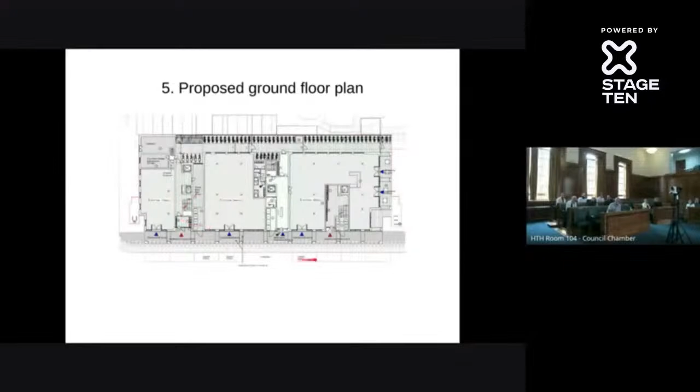There are the 2 main residential circulation cores. This one here has 2 lifts, and that would service 27 flats. The one on the other side has just 1 lift, and it would serve fewer flats, 21 flats. At the rear, there's quite a lot of cycle parking provided, a total of 153 spaces. Then at the front, there are 3 refuse and recycling stores, separate ones for commercial and residential.

The scheme will provide a total of 48 homes, including 10 affordable units. This is a provision of 21%, and earlier on I mentioned those mixed-use schemes quite close to the River Lee. This provision of affordable housing is quite comparable to those; those sites provided varies from 0 to 25%. So it's the sort of level of affordable housing we've been achieving elsewhere in the area.

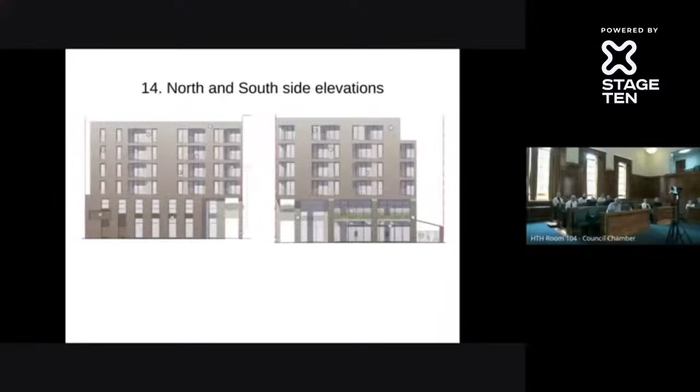The north and south side elevations of the building have the same sort of architectural treatment as the rest.

In particular, there are two bedrooms with windows at rear ground floor level and two at first floor level that would suffer a significant loss of light that, in my opinion, would lead to a significant loss of amenity for the users of those bedrooms.

So whilst of course it would be better if there were no harmful impacts at all, there are some mitigating factors to take into account here. Firstly, the rooms affected are bedrooms, not living rooms, kitchens or dining rooms where a loss of light would be more serious. And there's also the mirror image argument, which you may have heard before - it comes up in some of the sunlight and daylight guidance.

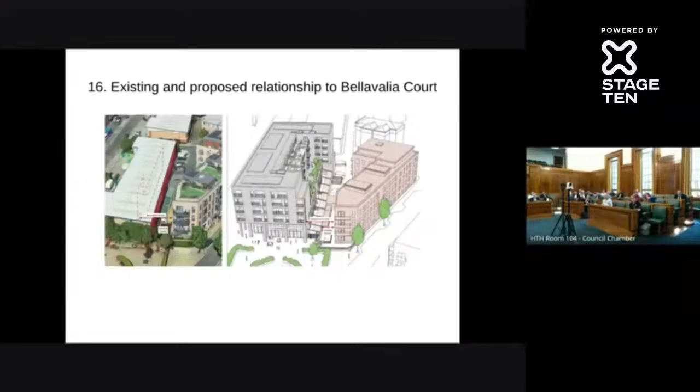I have a few, but happy to be interrupted. First of all, on the light, could we have a bit more on why you're not concerned about that significant reduction of light to those on the ground floor?

I think that was what you said, that there is quite a significant reduction, 40%, 44%. Should we take that one first? Should we take light first? I think it's an important one. So how did we come to the conclusion that this is acceptable?

Yes, most of the windows, actually, I've just showed this visual image. This shows it better because you can actually see the windows in Bellavalia Court that are affected. And most of those windows, if not all of them, will experience some sort of reduction in light. Some of those reductions wouldn't be noticeable. I think 20% reduction is considered to be noticeable.

And a 45% reduction seems a lot, but it may not be so bad. It depends. At the moment, some of those windows have a very open aspect because the existing building is 2 stories high. There's a lot of light that comes over the top of it, so they're probably getting more daylight than many others. The 45% reduction, I'll show you the windows which I think are the most harmed.

At ground level here, there are 2 bedrooms. Can you see the dot? Just about. And then at first floor level, there's 1 bedroom above that, and then 2 bedrooms above that. And then there's a bedroom at ground level right in the corner down there.

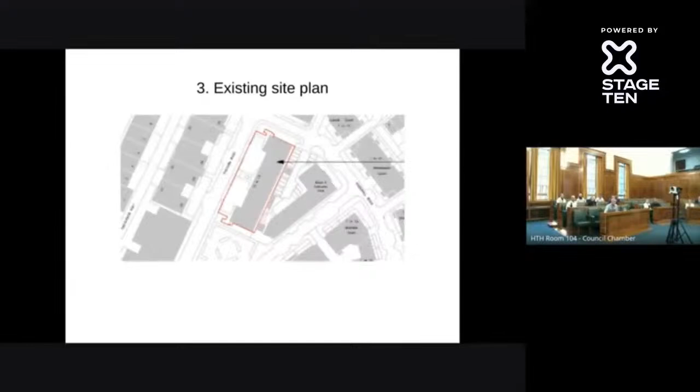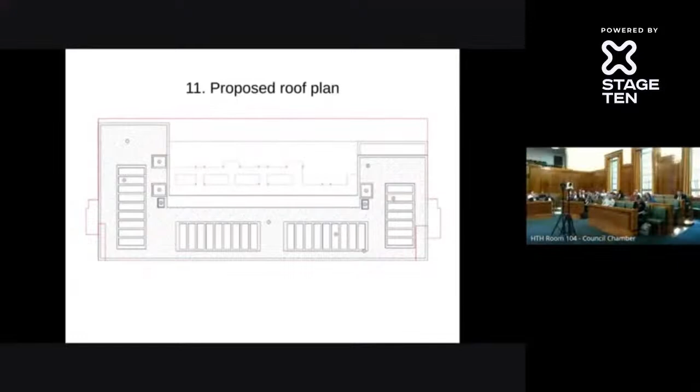Okay, so turning to the new building rather than the existing building, I see that in 6.5.4 and the paragraphs following, there's no full embodied carbon assessment at the moment, and air source heat pumps have been proposed, but there's a concern about how they'll look on top of the building. Do we have enough information at this stage to know whether the sustainability of the proposed building is good enough? I see you're proposing it's reserved by condition, but do we have enough information before us to make a decision subject to that? Or would the proposal be that it comes back to this committee to look at the sustainability of the building?

Yeah, there are some gaps in the sustainability information. There's some things which could be improved, but it's clear from the information that we have that it meets policy. It provides in excess of the 35% reduction required by policy. We'd like them to go further, and we think there are some issues that further information can be done on—on how they're actually going to achieve some of the principles, the objectives they said they'll achieve. We need more information, which is entirely appropriate to put till later.

Deciding on materials and stuff is something which is often done. It's difficult for them, if not impossible, to do now. So it's reasonable to require some of these things to be submitted later on. But we are clear that the information does meet policy. Clearly, we'd like them to do more, which is part of the reason for the conditions we've proposed.

Yeah, is that something we can ask to come back to us? Yes, absolutely. Would it come back to committee, or no? What is it that you would want to see, I suppose?

The full wording of the condition is in the addendum, and there's quite a lot of them. Some of it is very specific and esoteric information that I don't think I would understand. For example, generally the buildings we see are told this building will have air source heat pumps, they will be sitting here, and this is what the boxing will look like. In this case, we're not being told that - we're told they don't really know what they'll look like. We're a bit concerned about how they will look on the roof, and so we want them to go back and reconsider. Bearing in mind the neighbours are quite anxious about how this is going to look and impact on them, it would be nice to know what that system is going to look like and whether it's going to be an eyesore.

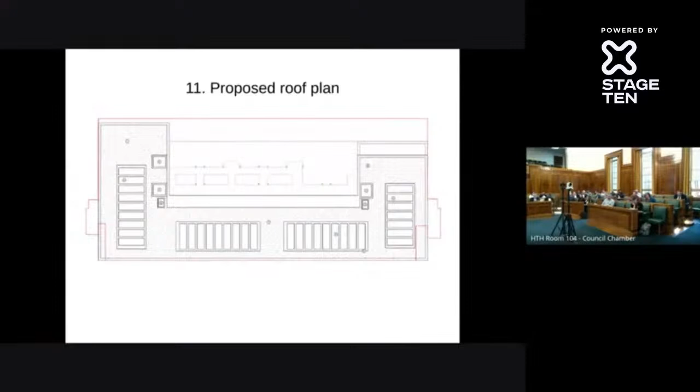This development has been in consideration for a while, and at the time it was originally designed, air source heat pumps weren't really a thing, so they've been reintroduced into the scheme. It's not the kind of air source heat pump scheme you've seen before with equipment put on the roof. In this instance, there's a plant room proposed at ground floor level, and we're proposing a combination of an air source heat pump that can be fitted there and ventilated, and a highly efficient gas boiler - I think 97% efficient - and that's part of the specification of that equipment, which is one of the details we've reserved.

In this instance, putting quite large pieces of air source heat pump equipment on the roof we don't think is a good idea, because the building is relatively low, and the topography means the roof is quite visible from a long way. We don't really want pieces of kit there. If air source heat pumps had been considered when the scheme was originally gestated, it would have been integrated more fully into the building, like we're doing with many schemes now - not plonked on top of the roof but incorporated within the envelope. This has been done here, but because it's at ground level, there are limits on what you can achieve with air source heat pumps. That's why we've got to this situation.

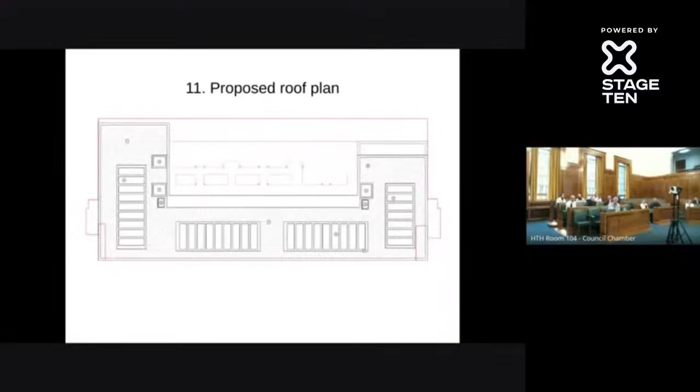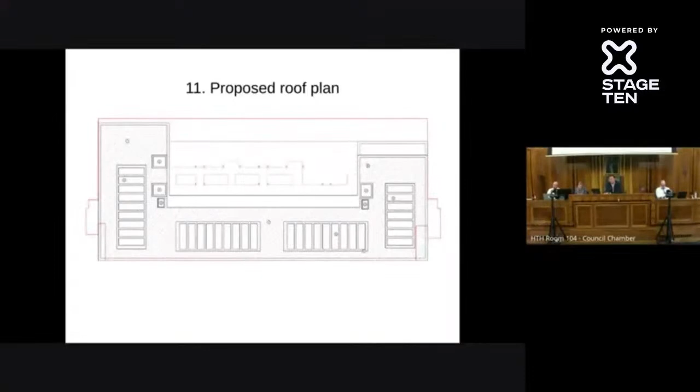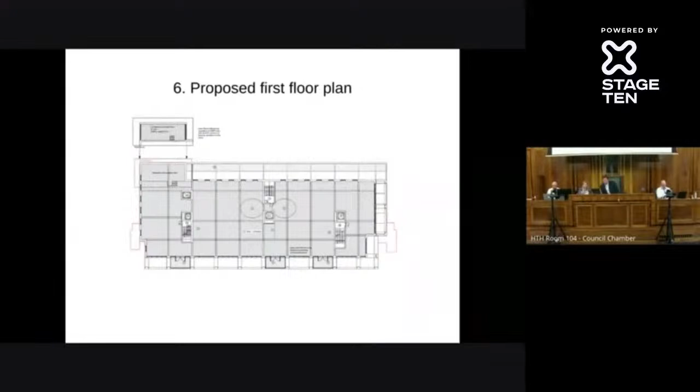So there'll be PV panels on the roof, not a deck. Where will the air source heat pumps be seen, since they need an outflow? The plant room is entirely internal - you can see here in this corner the LEV substation and a plant room, which has a mezzanine at first floor level. So there's a two-story plant room at the rear to accommodate the gas boilers and air source heat pumps. The only thing going on the roof is fairly low-profile PV panels, plus lift overrun, and emergency opening hatches for fire ventilation. So the roof will be a biodiverse roof with PV panels, but it won't have the air source heat pumps on it.

Residents are concerned about the aesthetic of the rear of the building particularly. Can you talk us through that a bit?

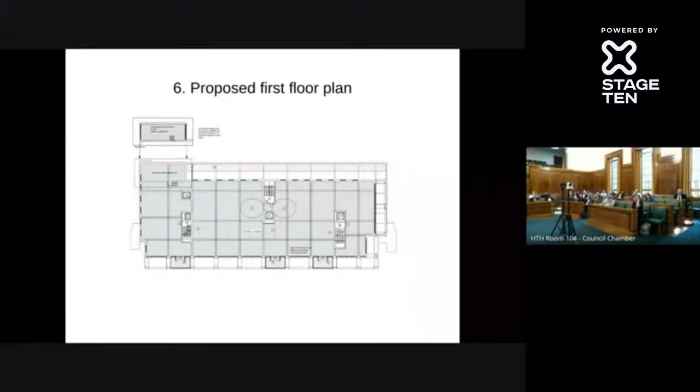For instance, the deck access is set far enough away from the residential windows to allow one neighbour to not look into close proximity of their neighbour's windows. And there's the private amenity space, which is the sort of greeny area at the back.

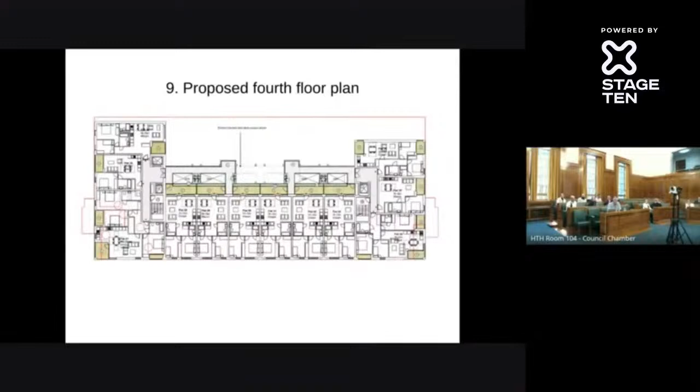We have Luciana online as well, don't we? We do, yes. Luciana, just in terms of that rear elevation, do you have anything to add from a design point of view?

Just to highlight that there was work done on that rear elevation to improve the appearance, particularly after the scheme was presented to DRP, because there was feedback from them. There was the addition of the brick grid, particularly on the upper levels, to add articulation. We think it works where it has a very robust brick base, and it's really well articulated with the recessed brick panels on the sides, and the rhythm of the window openings. I think the way they've articulated the deck access provides some interest to that elevation.

Okay, and the deck access and bringing it back at the back presumably increases the light, does it? Instead of filling the entire block in?

Yes, well, I suppose Rob can comment more on that aspect, but it does help. I think one thing it does help with too is to break the massing a bit, so it's not too oppressive and solid. So it definitely improves in that sense too.

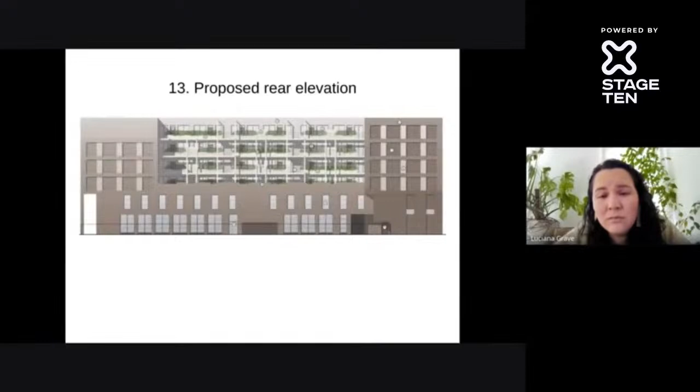Yes, if I can ask Nick, is it intended to build these traditionally with brick and breeze block, or is it going to be timber frame? There was a very nasty fire several years ago in a building a little way before, and I'm not sure what the building composition was, but it spread like wildfire. So, A, composition of the building, and B, can you confirm there won't be any cladding which could exacerbate any fire? Also, I noticed in the report there's no feedback from the fire service.

Is there any particular reason for that? We certainly used to have input from various statutory organisations like them. So perhaps I could ask Graham if you've had any contact with them to check they're happy with the design.

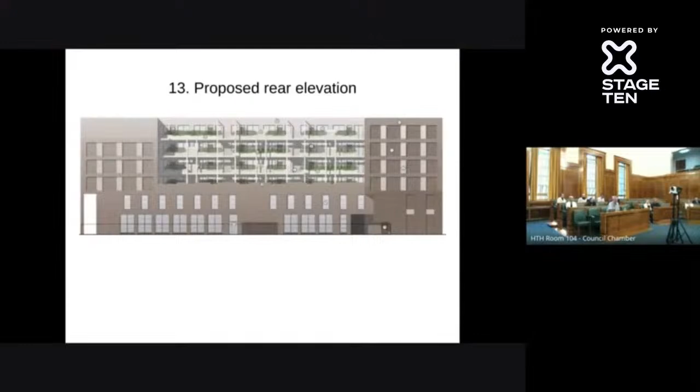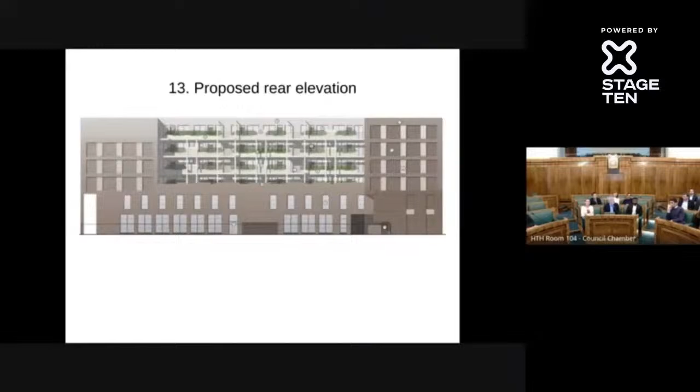Well, I was just going to reiterate that point. Obviously the main material used is brick, as you can see from the main elevations. But what I'd highlight is that the building regulations and the fire regime is a very fast changing area at the moment, and we will be, following building regulations control, taking specialist fire advice on that. But as Rob highlighted, it's not a tall building in a fire sense, so we don't see that being a problem. It's just a process one has to follow very carefully.

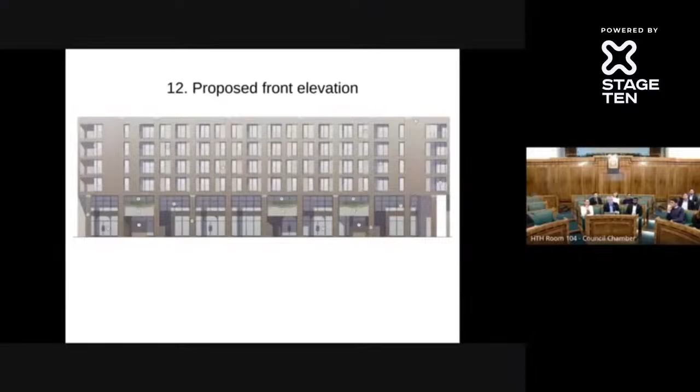Yeah, thank you. So it was just on the housing tenure mix. It says that the unit size mix isn't compliant with policy. I was just wondering what discussions were had with the applicant about whether that could be adjusted to make it more policy compliant in terms of the number of 3 beds, 2 beds, 1 beds, and how that relates to the disagreement on the financial viability assessment of what was viable in terms of housing.

Yes, I think in terms of the housing mix, it's more the recommendation policies. For 33% for 3 bedrooms or more, this delivers about 20% from memory. So it's not far off, or is it 18.5? Yeah.

That's not unusual in a scheme. Once you get over 20 units or so, and the schemes get bigger, it tends to have fewer of what used to be called family-sized units in them. We'd rather have more, but then again, we'd probably get less affordable housing if we did that.

And in terms of the viability, I think we've agreed this offer of like 10 affordable housing units to go in there, even though the developers are insisting that they think that scheme is not viable. We think the differences between us in terms of the viability relate to the inclusion of the financial cost of a restrictive covenant that applies to the site, which we think should be reflected in the value of the site itself.

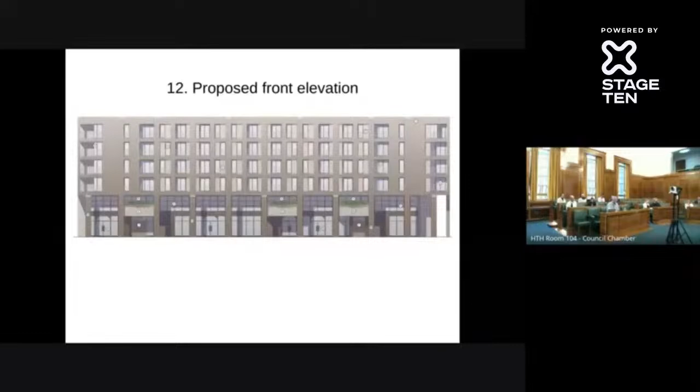Okay, I've got questions if no one else does.

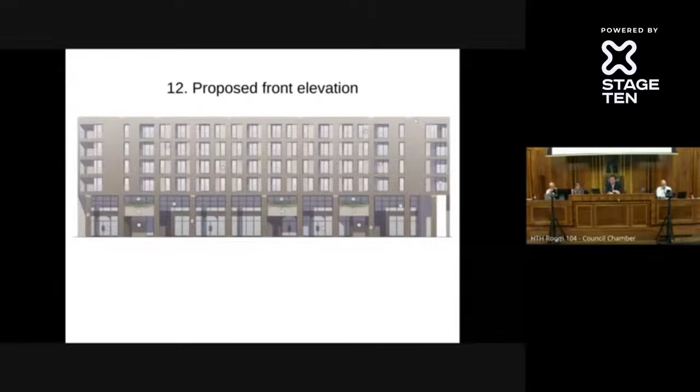Right, okay, in that case, just on the loading bay and the current building, it obviously has a drive-in bit for the offloading and work of the building, and that's being designed out essentially. So now the streetscape has to bear any sort of loading for the businesses that will take space in this building. So why is that acceptable, to lose that off-street loading capacity and move it onto the street?

I think it's because of the comparative nature of the service demands for the two uses. The existing building is predominantly storage. You can see some of the yard in front is actually used for open storage. The vehicles using that tend to be much larger and have longer waiting times, so require somewhere off street to be. The proposed ground floor space is purpose-designed industrial space, but it's not going to have the old-fashioned industrial uses in it. It's going to have the equivalent of modern light industrial uses, which have far less requirement for servicing demand. We think it's acceptable for that to be done on street. And that's really it, I suppose.

Okay, Joe, can you expand on that a little bit? Sorry, I forgot you were online.

Yeah, further to what Rob is saying, that nuanced change of use means that the delivery and servicing impact is going to be considerably less. The applicant submitted a trip generation assessment estimating around 10 commercial deliveries per day, which is fairly modest. We're certainly satisfied that will be appropriate on street from that loading bay.

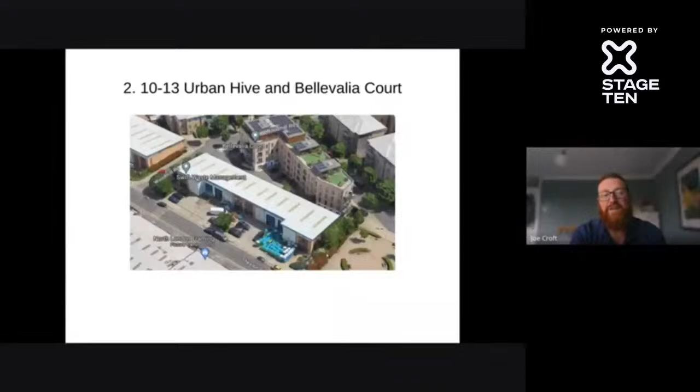So we're certainly satisfied there shouldn't be any undue parking stress. Linked to that, in terms of policy, the council is extremely clear that we will continue to do everything we can to make it difficult to own and run a private vehicle in Hackney. Around 36% of our residents own private vehicles, so it's a minority, and we want to continue to reduce that. In the local area there are school streets and low traffic neighbourhoods, a number of sustainable transport schemes that restrict vehicle movements. We've got an exhaustive CPZ, and we're making the site car free as well. So weighing that all up, there shouldn't be any undue detriment to vehicle parking stress in the local area.

Okay, thanks very much, Joe. And just a couple more things from me, keeping an eye on the committee. There was a question raised about the 4-foot setback on the covenant of other buildings on the street - is that a material consideration in this one? No, and no.

Can I just ask the objector what the point was there, sorry? I'm double checking with our solicitor, but in our land searches when we applied for the property, there's a covenant across Wood Mill Road. It was previously a sawmill, and there's a covenant stating you can't build above 4 stories, and the house must be set back I think 4 feet from the street. I haven't been able to obtain a copy in time for the meeting, but can send it over once I receive it from the solicitor if needed. Is that specific to a separate building, or for the street this is on? I'm quoting from memory because we only purchased the property a few months ago - I believe it applies up to the edge of Thaden Road, but I need to check that. Okay, that's fine, thank you.

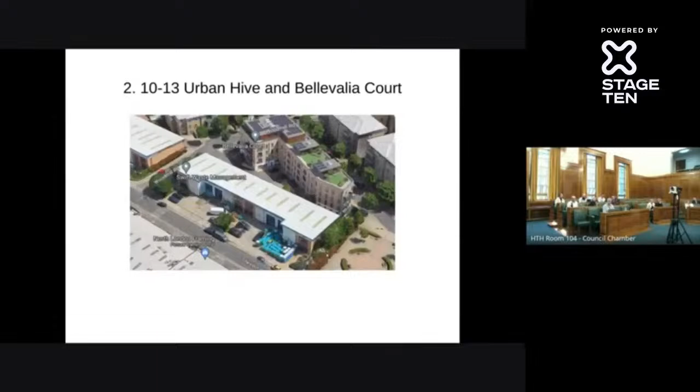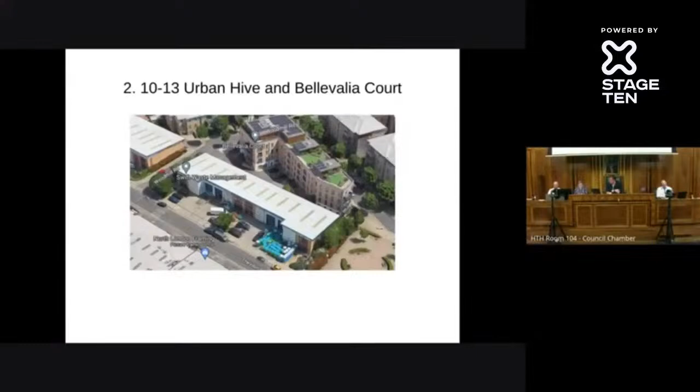And then we heard about overlooking, or rather in-looking, from the rear elevation of the new proposed building into Bellevalia Court. What is the impact and what's the analysis of that, please? The distances vary because Bellevalia Court's at an angle, but with the setback of the upper floors, the distances are not unusual at all.

Maybe if I just show - we've got the main rear elevation of Bellevalia Court here, and the rear building line here, which is probably up to about 30 meters, maybe more. What was of concern to us in terms of overlooking and visual privacy was the use of the amenity area at 2nd floor level. If people were coming up to the edge, that's closer - the distance is about 24 meters. Hence the request for a condition to require a privacy screen there. But the distances on the upper floor levels are not at all unusual in a borough like Hackney.

Was there any consideration to set the deck back slightly, so the edge of the deck is brought back? That's a balance between increasing the visual prominence of the deck for the Bellevalia residents, versus protecting the visual privacy of the future occupiers. You don't want people wandering down the deck in very close proximity to your windows, but then again you don't want the deck too far away so that it's too visually prominent from Bellevalia Court. The distance being proposed, we're sort of comfortable with.

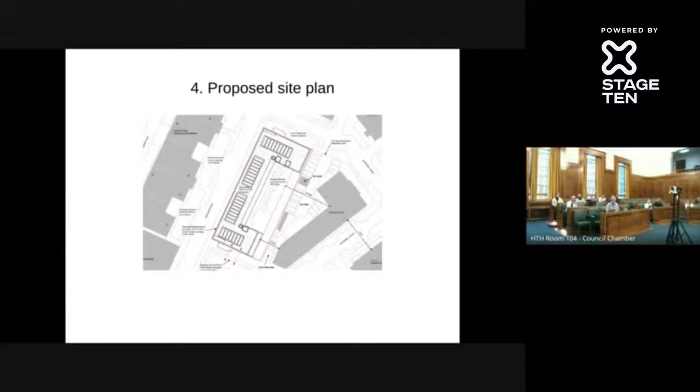It's based on a review of viability. And unless there's some amazing change in wider economic circumstances, I'm afraid the development's likely to get more expensive and less profitable in the future. But the viability review mechanism is there in case there is some wider change in economic circumstances, which means we could achieve more affordable housing without making the scheme unviable. And this has happened in the past, on a reasonable number of applications, and it has been activated, so the mechanisms are there.

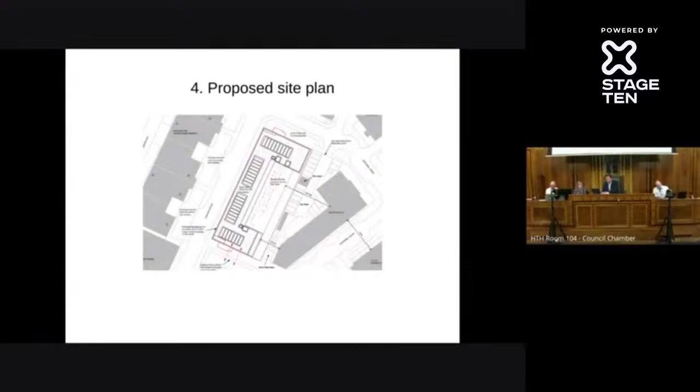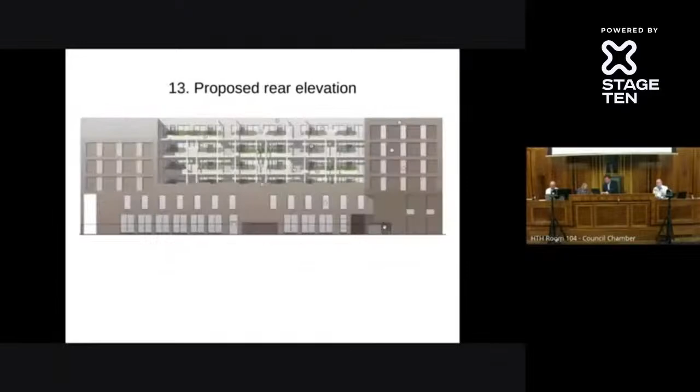Great, any other questions? Okay, none from me. Great, in that case, if I just bring up papers again, we'll go to a vote. Chair, the recommendation is in your chair's brief. Oh, thank you, well done. Sounds like you do my papers in that case.

Yeah, exactly. Great. So the recommendation is to grant planning permission subject to conditions and completion of a legal agreement. Can all those in favour raise your hands? Thank you, that's unanimous. Okay, thank you very much. Thank you for everyone participating.

We'll wait because I think we'll have a bit of a move over of speakers, objectors and applicants. So in terms of speakers, we've got no objectors for item 6, Development House. And in terms of speakers, we've just got Matthew. We got to pronounce that correctly? Okay, thank you, Matthew. So if you want to move over, we've got a choice, you can either go.

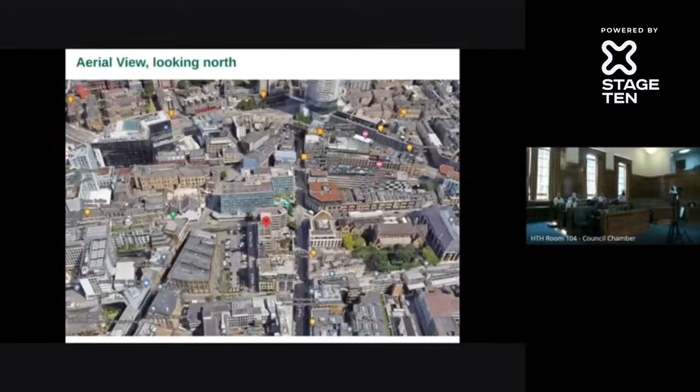Looking north, the site lies within a mixed context of residential, retail and commercial properties. Scales vary quite widely, but shoulder heights are predominantly 3 to 5 stories, climbing upwards as they move towards Old Street roundabout and the City Road. 49 to 51 Paul Street lies directly adjacent to the south and is in an advanced stage of construction to become a 10-storey hotel. Telephone House can be seen here in the foreground across Leonard Street to the north. It's another 7-storey post-war office building, which is the subject of another current application for redevelopment.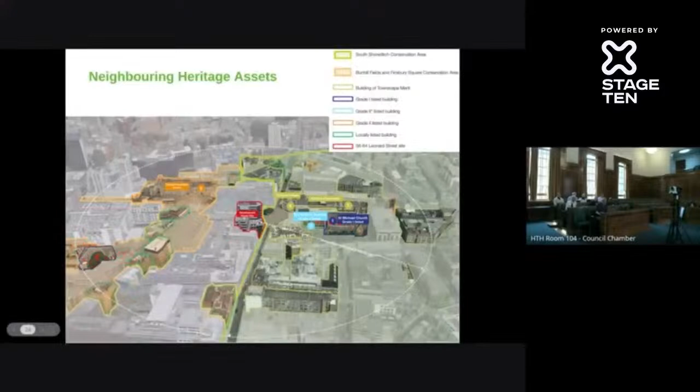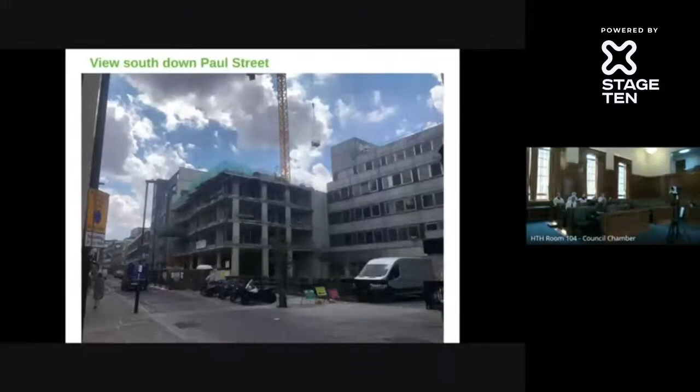This scheme is very similar to that approved previously under 2017-4694 and 2020-0694. Since the time of the previous approvals, in most respects, the policy context has remained consistent, though a new suite of policy documents are in place. Nevertheless, the committee report details areas where policy has been amended, such as sustainability. The reason for the current application is that the original permission was never implemented and is no longer extant, so the approved scheme could no longer be built.

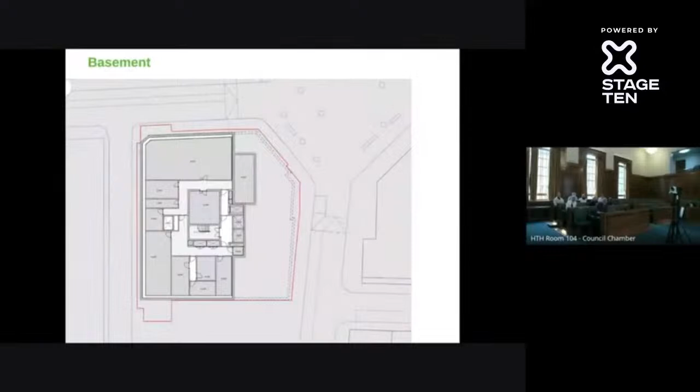Taking a look at the plans, there are 2 basement levels. The first is for plant. The lower ground floor has around half of the 804 square meters of affordable workspace. This would be provided at 40% of local market rents in perpetuity, in line with policy targets for the Shoreditch priority office area. On this floor, there's also a large cycle parking area. The increased size of the cycle parking store is one of the few changes to the approved scheme.

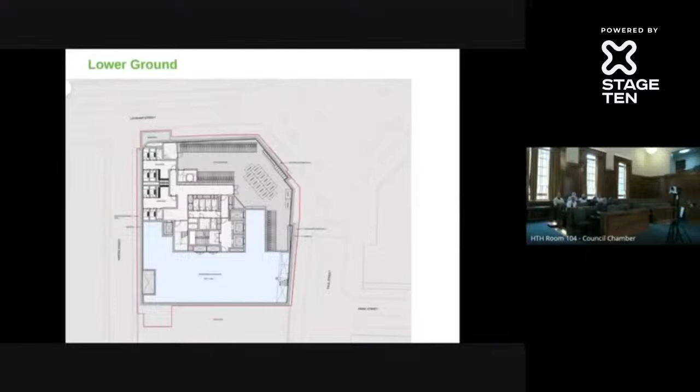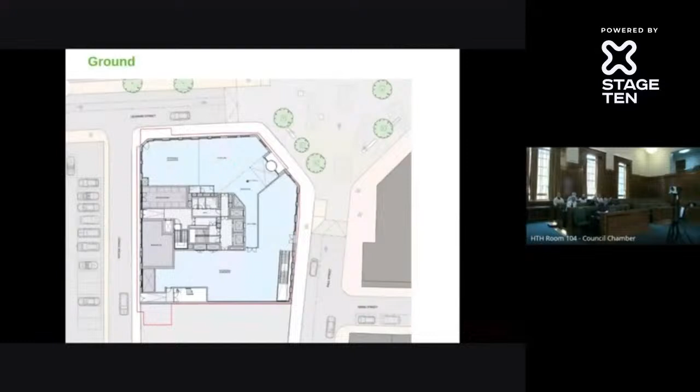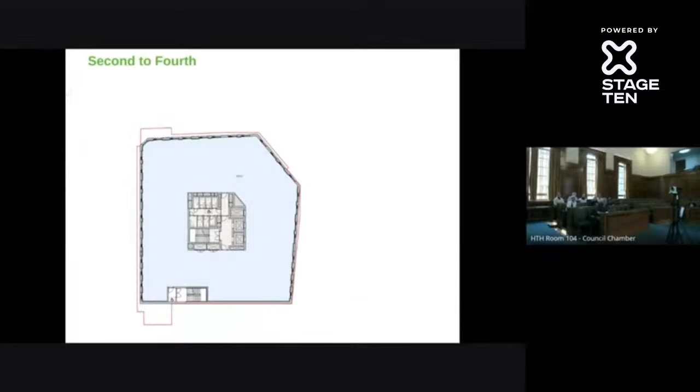The ground floor plan has the rest of the affordable workspace here and along here, and also the retail or restaurant space here, providing an active frontage onto Leonard Circus. The upper floor plans are all in office use. As is laid out in the committee report, the proposed accommodation is of high quality. The 2nd to 4th floors all have the same floor plate. As the building rises, terraces are introduced, reflecting a reduced massing.

At the 9th floor, the scale is greatly reduced and a larger terrace is introduced. This will provide amenity space for the new office workers.

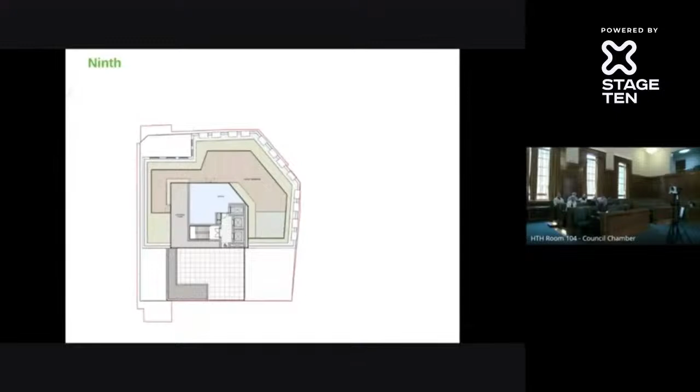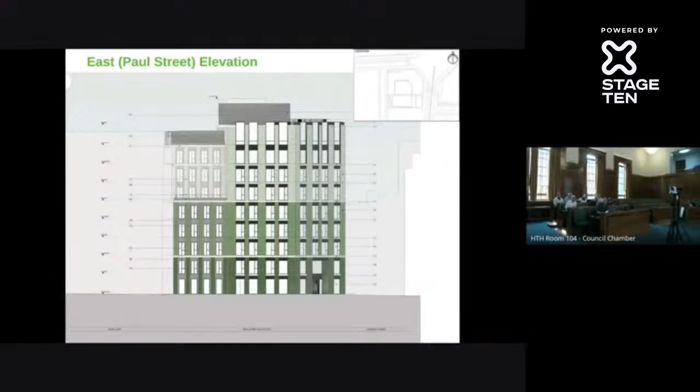As laid out in the committee report, in design terms, the proposal is considered of high quality and appropriate character. The cutbacks to the Paul Street and Leonard Street elevations reduce the perceived bulk and create a slimmer profile to the taller block when viewed directly from Leonard Circus.

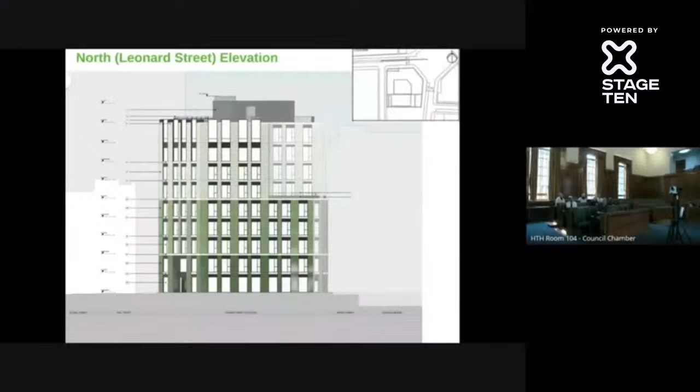The modern warehouse typology, robust vertical proportions, and richness in detail of the proposed glazed brick facade is considered to successfully reference the local area in a contemporary manner and to capture the character of the surrounding streets.

In conservation terms, while there is some harm identified from the height of the taller element on the setting of the South Shoreditch Conservation Area, this harm is considered to be less than substantial.

This slide shows the proposed view past the Grade 1 listed St Michael and All Angels Church, which has had a recent approval for a 6-storey building on the Leonard Street frontage in the foreground here. Here too, the harm caused to the building setting is considered to be less than substantial.

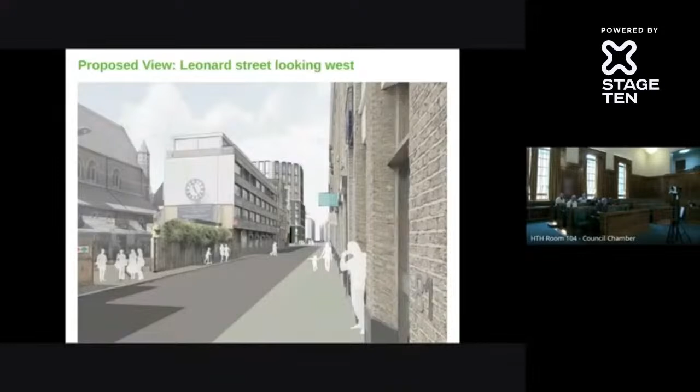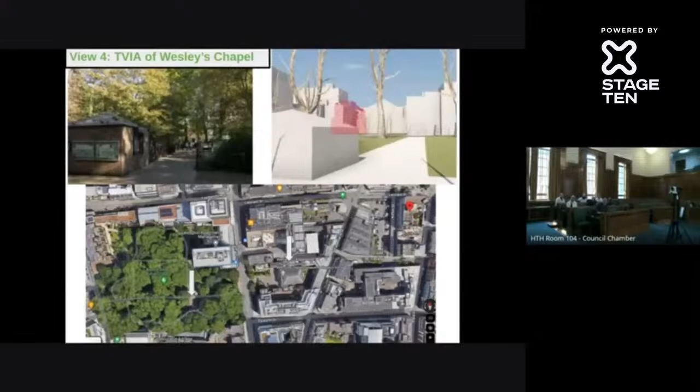London Borough of Islington have raised concerns about the impact on Wesley's Chapel, but we consider that the views are so limited that any low end of less than substantial impact is outweighed by the benefits of the scheme.

With regard to the public benefits, the committee report finds that the proposal's high design quality, its enhancement of a rundown site, and its activation of the Leonard Circus frontage, not to mention the amount of employment floor space, would meet the public benefit test to balance against any less than substantial harm it causes to the setting of heritage assets. Overall, the proposal is considered acceptable in conservation and design terms.

The committee report also examines the amenity impacts of the proposal in detail. While there are some significant amenity impacts to daylight, sunlight, and outlook, for example, these are in line with the impacts of the consented scheme.

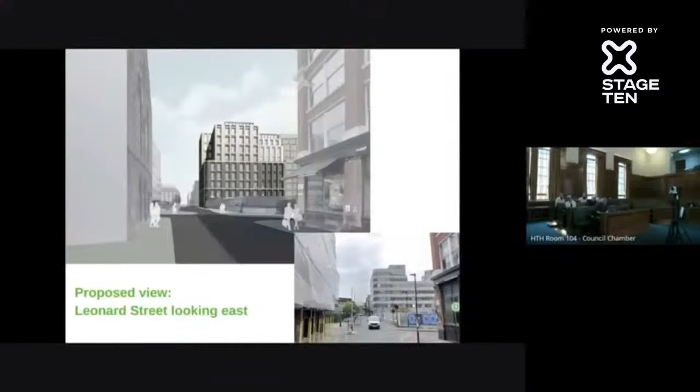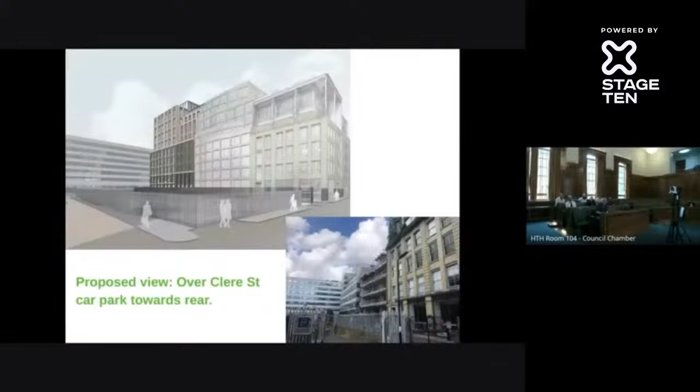Neighbouring residential properties would be left with levels of daylight, sunlight, and outlook that we assess to be typical of the surrounding inner city environment, and the amenity impacts of the proposal are considered to be acceptable.

The proposed energy strategy includes many energy efficiency measures, and there are a number of conditions to ensure the sustainability of the building is carried out effectively. A BREEAM rating of excellent and above 75% is required.

The building will utilise air source heat pumps, and renewable technologies in the form of photovoltaic panels will be provided on the roof, which will help to meet electricity demand. The scheme exceeds the minimum 35% reduction from the carbon baseline, in line with the GLA and Hackney energy policies.

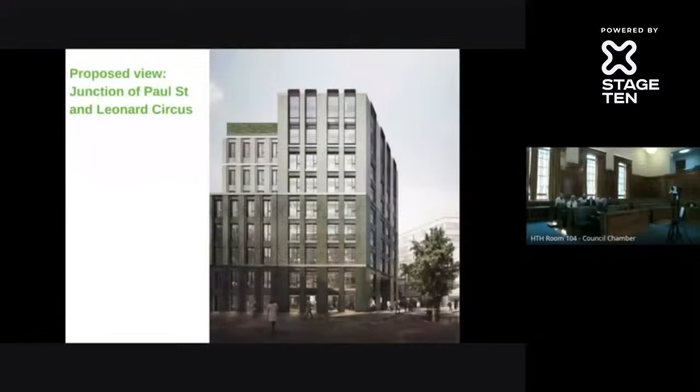The shortfall from net zero is 55 tonnes per year, which requires a carbon offset payment of £157,000 to be secured through the proposed legal agreement.

In terms of transport impacts, it's also considered acceptable. It would be car-free, save for one blue badge space to be provided nearby, and the long stay cycle spaces are to be provided with a balance between accessible spaces and overall quantum. It will be determined at the next stage, in line with the recommended condition.

There are no short stay cycle places proposed on the site itself, and as at the time of the previous approval, a financial contribution has been agreed to provide the required 31 short stay spaces within Leonard Circus.

Since Transport for London have identified a high level of usage of the existing cycle hire stands in the immediate vicinity, the applicant has agreed to pay £55,000 to help provide a new dock nearby.

A financial contribution towards highways works of £235,000 has been agreed to enable works to the adjacent pavements and an extension of the stone surfacing of the circus onto Paul Street.

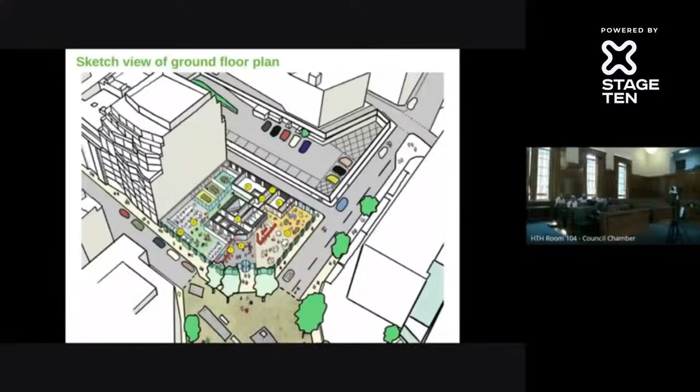To conclude, the proposed application is considered to be policy compliant. The use is appropriate for the priority office area, with the ground floor providing an active use onto Leonard Circus. The proposal represents a high quality design that would enhance this highly visible and underutilised site. As detailed in the committee report, in these and other respects, the scheme is considered acceptable. It's recommended for approval, subject to conditions and a legal agreement.

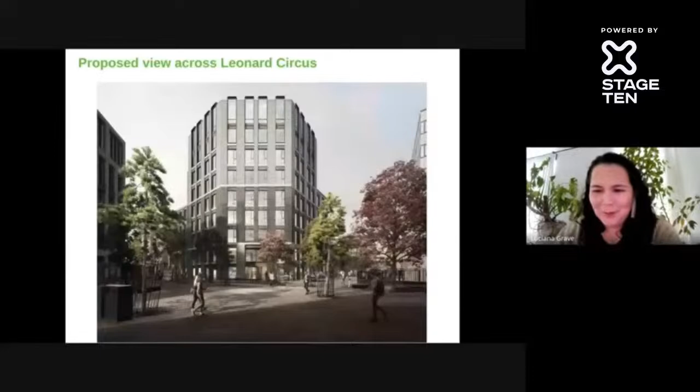I'll stop there, and I hope it answers your question.

Okay. Looking at pre-app 1, pre-app 2, and then the DRP, pre-app 2 had it much more broken up. It's not a monolith to the top. It's got some design aspects on the top floor that provide a bit more of a breakup on it.

But that was chosen and designed—I can't speak to it fully—those were pre-apps done prior to the previous approval, rather than this one. This one has been put in because this is what was put in before, to be blunt, and it was found acceptable before. They haven't done additional design work on this one because we consider it to be a high quality design with many of the features we were looking for in this location, and approved it on that basis. So they haven't gone back and reinvented the wheel. But pre-app 1 and pre-app 2—I'm giving you reported speech about what was happening there, based on what previous design officers told me.

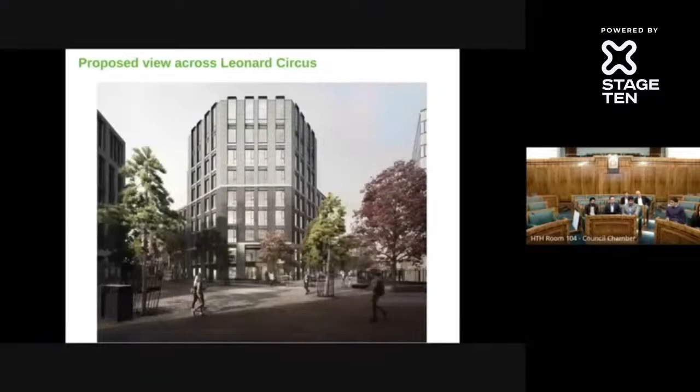In terms of incineration, the waste plan has 20% going to incineration. It'll be reviewed, and because the circular economy is monitored by the GLA, we'll be looking at diverting it to reuse sources first, then potential recycling, depending on the condition. Thank you, that's it. Thank you, Councillor Young.

Yep, Jess. Chair, it's not the building itself, but with this committee, particularly with big buildings, you get this feeling of being squished in. We used to ask about streetlights and whether they could be incorporated into the building to take away street clutter. I know it's not there, but I wondered if this is something we still raise with applicants, to take one thing off the pavement. Is this for Nick or Luciana? I'm just trying to remember if we had a street lighting condition, because it's such a tight site.

I'm not 100% sure, but there may already be an existing street lighting strategy that's part of the Leonard Circus redevelopment. I don't know if anyone on the call would know about it — I'd be putting Joe on the spot, but he might know.

Whether there was anything, there might be kind of like decorative architectural form street lights as part of that square. So that might already be in place. It might be something that we wouldn't necessarily want to adjust. So I don't think we'd want to pile straight in and suggest street lighting on the building for this one.

Yeah, I think Joe wants to come in. Joe, are there streetlights there? Are they decorative that we want to keep, or are they not?

I don't know specifically, but clearly Leonard Circus is already an area of high quality public realm, and the Leonard Street reworks will be very, very high quality and funded, significantly in part by this development. So I would very much anticipate that high quality street lighting will have been factored in, and obviously all of our policies are geared towards minimizing and reducing street clutter wherever we can for obvious reasons.

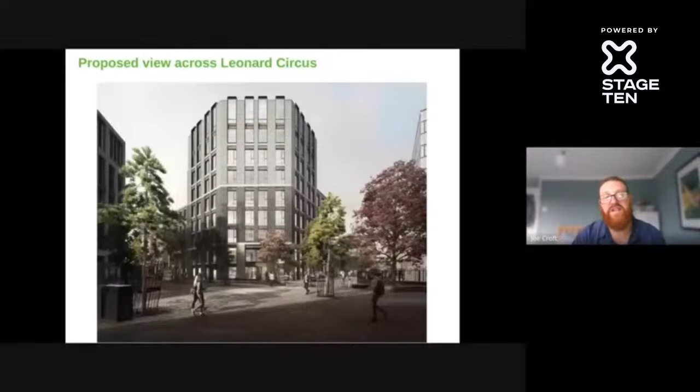I suppose the question remains: does the planning department still encourage integration of street lighting into the buildings when the paths are so narrow around there, for example? Is it something that's asked of applicants? Is it in policy?

Sorry to cut across you, I probably should have answered that bit of the question straight away. We've imposed it as a condition a few times, and it was always a kind of feasibility condition. I don't think there's ever been a scenario where the developers, very willing developers sometimes, have managed to come to an agreement with the council on it because of the logistics of it.

Just very quickly doing a site visit via Google Maps, looking at the street lighting in Leonard Circus, it's all brand new and it's all been done. It looks like it's been designed very much with the remainder of the public realm in mind. So I think it wouldn't make much sense to try and suggest any changes in this case.

Okay, thanks very much. We should tackle Wesley's Chapel, given the comments from the neighbouring borough in particular. So can you just run us through the objection, the analysis, and why you've ended up where we have, just so we're clear on it?

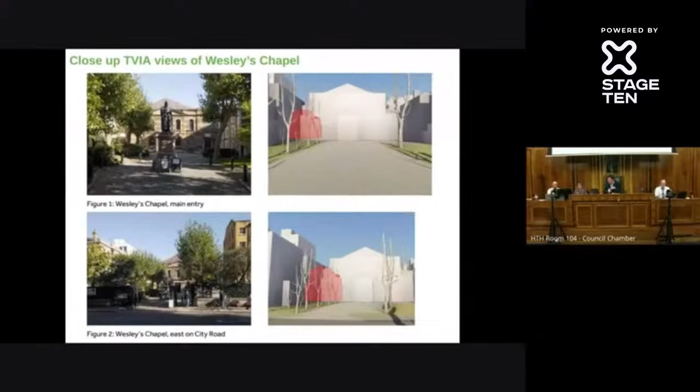So I've got two additional slides in case this came up. If you look close up at Wesley's Chapel, you can see in this figure 1, this is a close-up view. You don't see anything in view 1. Then you get the tiniest sliver coming through that if you zoom in, which probably wouldn't be that helpful. Just believe me, there was the tiniest sliver here on figure 2.

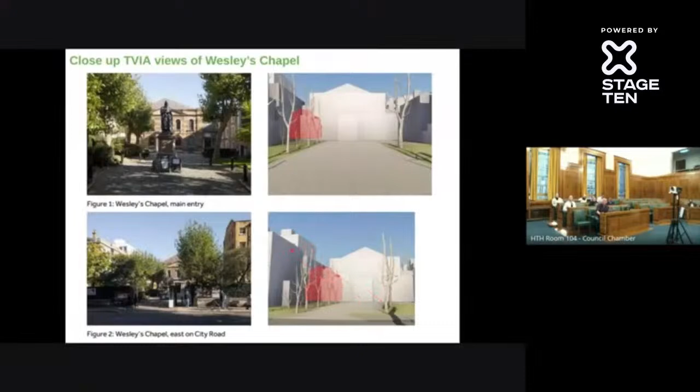At that point, we consider this to be really a very low level of less than substantial harm. And just as we've balanced that against the public benefits in terms of the heritage assets with the conservation areas or the St. Michael and All Angels Chapel, we've considered that it balances acceptably against those public benefits.

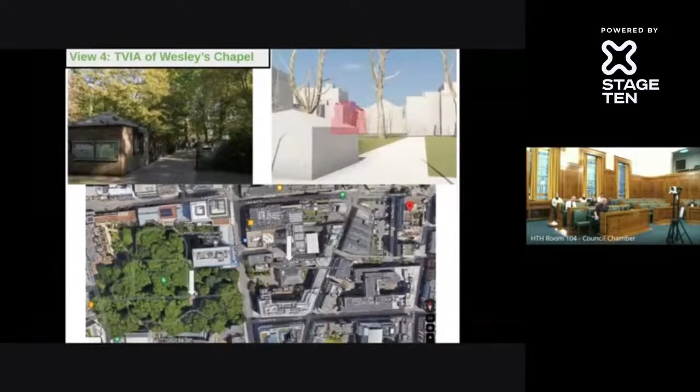Okay, thanks so much. Everyone content with that? Yeah. Any other questions from the committee? No? That's coming from me. I think the tiles in particular are really good. So on that, great. Shall we go to a vote in that case?

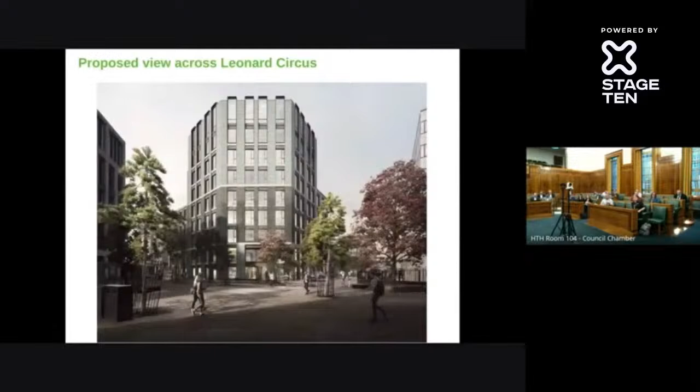Great, fantastic. So the recommendation is to grant planning permission subject to conditions and completion of a legal agreement in relation to section 106 of the Town and Country Planning Act 1990 as amended. All those in favour, raise your hands.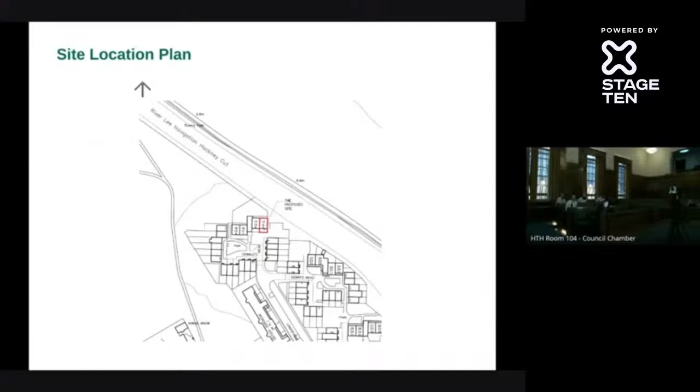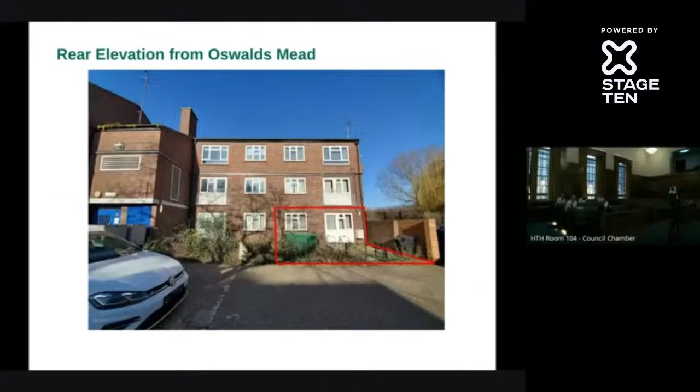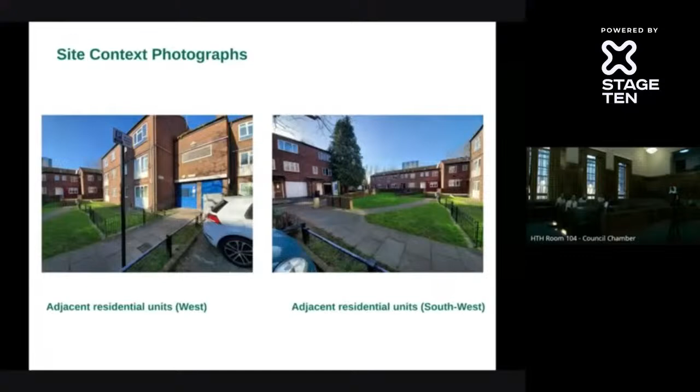This is just a rare picture of the front elevation, as they've called it. Outlined in red, you can see it's the ground floor unit, and this is from the front within the car park. This is referred to as the rear elevation, where the cycle storage would be proposed. For context, this is the adjacent building with residential units and the surrounding adjacent residential units.

So the proposed unit would be a 1-bed, 2-person flat with a gross internal area of 50 square meters, and it would be social rent. So the only external change is the cycle storage unit, and that's just an example of it there.

To summarize, the development would not give rise to any significant offsite amenity or highway impacts and would be delivering a public benefit in the form of a social housing unit. All other material planning considerations have been covered within the committee report. So the officer's recommendation is to approve the planning application subject to conditions and the completion of a legal agreement.

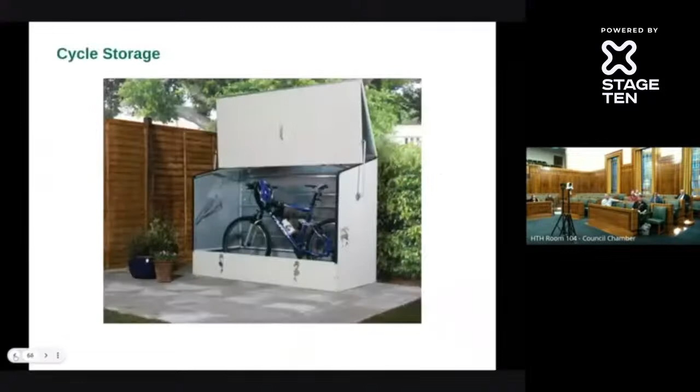Does anyone have any questions? I know what they'll be. Anyone, hands up? Go on. I don't know this particular estate, but are we doing anything to reduce the risk of damp and mould in the property when we're doing this renovation? So in effect, are we also retrofitting it?

My response to that would be that the existing use prior to the community flat was residential itself. So I guess, to my knowledge, nothing new.

Any answers, or is that from the applicant? Yeah, I mean, just to say that the flat would be refurbished as part of its conversion back from a community flat. And obviously as part of that, it's got to have adequate heating and ventilation, which obviously mitigate against the effects of mold.

So is the SAP rating or is it EPC at the moment? Is that building, that block, and therefore this flat, already at an EPC, a sort of acceptable level of energy efficiency? Sorry, are you asking if it's got a damp-proof course? No, I'm asking if it is at an acceptable level of energy efficiency at the moment as a building, normally called an EPC, that is the acceptable level for renting out.

That's covered by building regulations probably more than planning. Yeah, but you'd normally see a proposal that says we are building this to X standard. Yeah, but I suppose it's change of use, I don't know whether that's okay. So, Catherine, can you just run us through what you do with it?

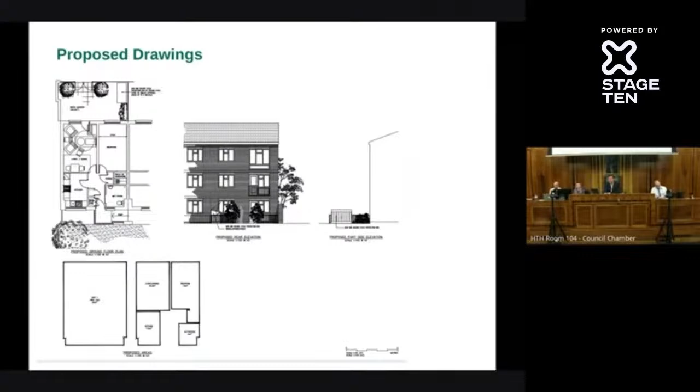Great, thank you. And then just the cycle storage, is that a standard cycle storage solution used by the council? Because it doesn't look hugely robust.

Yes, sorry. That's the same cycle store we've proposed on previous flats, and it's galvanized steel and lockable, so it is secure. I think it's bolted to the ground as well. It looks quite plasticky in the photo, so if it's galvanized steel, that's better, I suppose.

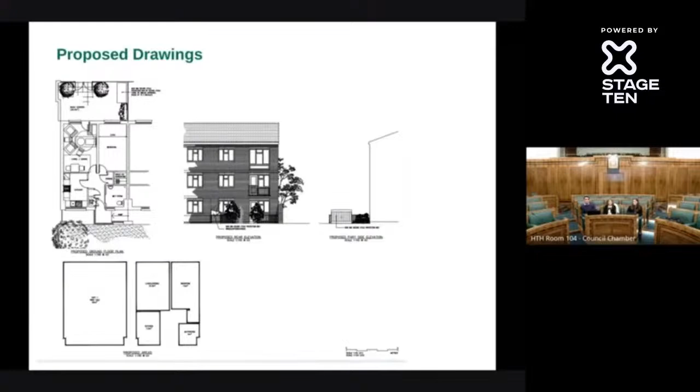Great, any other questions? We've seen some of these before, so I think we know where we are. Okay.

Let's move to a vote. Recommendation is to grant planning permission subject to conditions and section 106 legal agreement. All those in favour, raise your hands. Great, everyone, thank you very much.

Great, thank you. Let's move on swiftly to the next one. I think the supporting people will remain in place, but we are moving on to 15 Keir Hardie Estate, and we are being led by Thomas Russell. Hi.

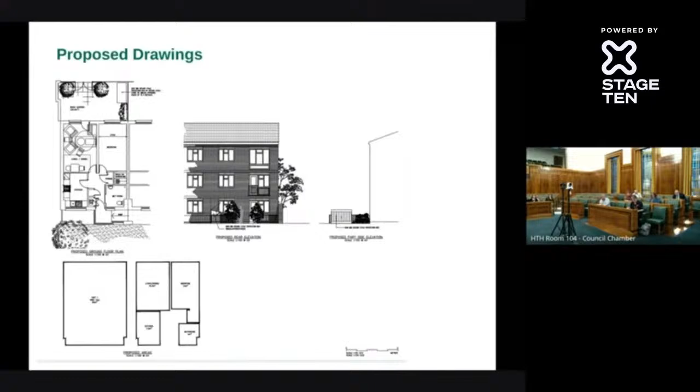Okay, so this application is very similar to what Catherine has just presented. It's for a change of use from a community flat to a residential unit. It's at 15 Keir Hardie Estate. This site is a community flat on the ground floor of a 5-storey block, directly to the east of Upper Clapton Road and to the south of Springfield and Springfield Park. The unit would be socially rented.

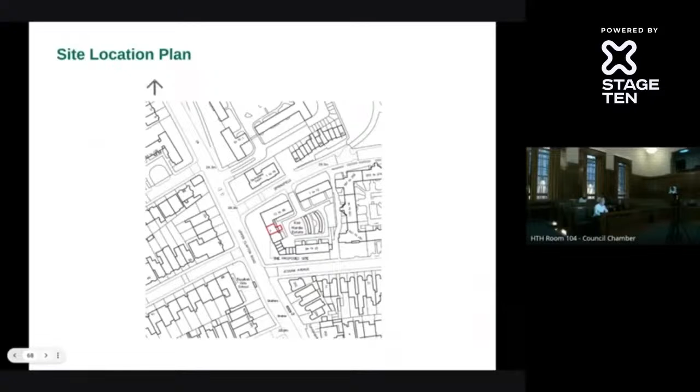So the design, there's minimal internal alterations proposed, but there are a few very minor external changes. One of them is the installation of a cycle storage that would measure 1.34 meters in height and 1.97 meters in width. They're also proposing the removal of a very small window across the front elevation.

This won't change the character of the front elevation of the unit. If I just go back a couple of slides so you can see the front elevation of the block - the flat above has also removed that very small window here. So there won't be any impact on the character of the front elevation of the block.

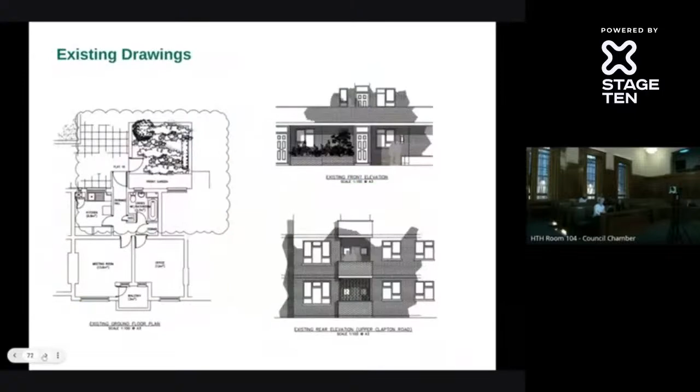In regard to alternative sites, it's obviously very small, not very usable for large scale meetings. There's a number of council-run accessible community facilities within walking distance, including Leabridge Hall just to the east, Wrens Park to the south, and Webb Estate to the north, all very close to the site.

The only other thing to mention is that the standard of accommodation, the gross internal area, is 44.5 square meters, which is 5.5 square meters less than the standard of 50 square meters for a one-bedroom, two-person unit on one story. This is considered acceptable based on the fact that it was originally built as a residential flat, and based on the need for socially rented residential units. So on balance, that's considered acceptable.

Then the only other thing is waste. They would be utilizing communal waste facilities to the front of the site, within that green around the blocks, and that is also considered acceptable. Approval is recommended subject to conditions and legal agreement.

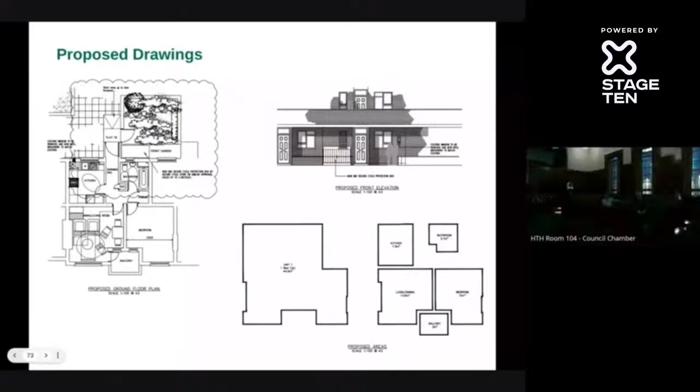It's the same question, and because everyone looked blank, I'm going to try and ask it differently. You can look up, I just did it, the energy performance certificate for any residential property. On both this and the last property, the energy performance certificates are below an acceptable level. So I just wanted to know, taking on point Shara's point about the whole block, are we taking any steps to improve the sustainability, the energy efficiency of the flat?

Tom, do you want me to answer that? Hi Councillor, just to say that upon conversion we're expecting the applicants to ensure the premises are up to current building regs standards, so hopefully that will cover those aspects of concern. Anything more to add, applicants? Just to reiterate, they will be upgraded to meet building regulations. As part of that it's likely to involve replacing the heating system, improving the insulation, replacement of lights and appliances with energy efficient appliances. So it's something that's part of the refurbishment, basically.

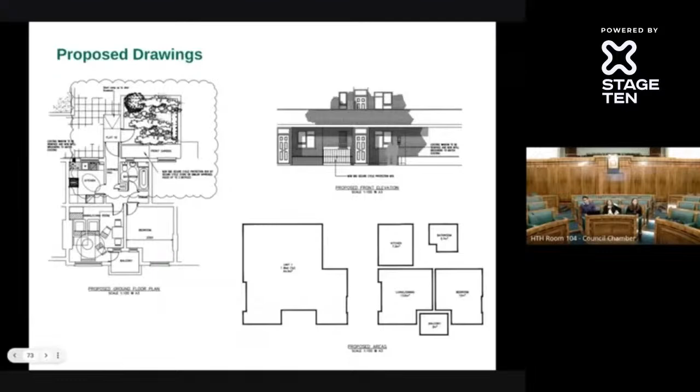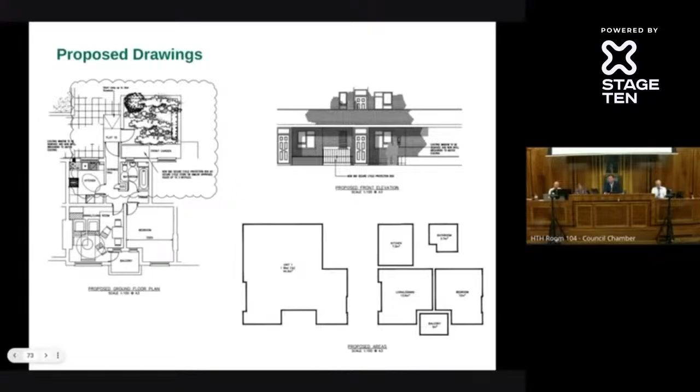Great, thank you. Is it currently in use, and is there somewhere else for residents to use nearby? It hasn't been used for the last 3 years, and the nearest community facility is within about 140 meters to the east. The other nearest community facilities, run by Hackney and fully accessible, are 400 meters to the south and 300 meters to the north. So based on the fact they're all within walking distance and would provide improved community space, the loss of this very small unusable community flat is considered acceptable.

Okay, great, thank you. Other questions? No. In that case, let's move to a vote. The recommendation is to grant planning permission subject to conditions and a section 106 legal agreement. All those in favour, please raise your hands. Thank you very much, that's everyone again.

Brilliant, thank you. And then the final one, we have item 9, Defoe House, a similar change of use without wanting to preempt Michael. So we're being led by Michael as the case officer this evening. Thank you.

The previous use was a community flat for a resident association meeting back in 2020, but it's been vacant since then. The layout remains unaltered, so it's therefore capable of conversion back to residential. In terms of policy, on loss of community facilities there are nearby alternatives: Hawksley Court, about 4 minutes away, another community facility an 8-minute walk, and Abney Hall near Stamford Hill.